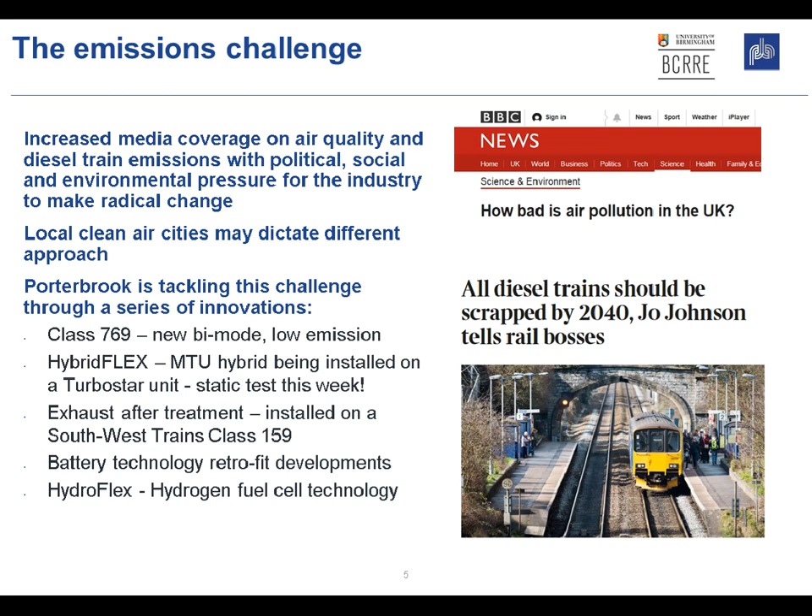So air quality is a big driver, but we also have an issue over carbon efficiency and the drive towards decarbonisation. There's another important factor: the energy supply the UK is currently using. At the minute, most of our energy is coming from low carbon sources, and we have roughly half of it from fossil fuels. But by 2050, that will be pretty much entirely low carbon or zero carbon. So the grid is becoming decarbonised.

This means we can produce hydrogen from the grid, and we don't need to worry too much about the fact that we have some inefficiencies producing the hydrogen, because the grid is already decarbonised. It just becomes an economic factor.

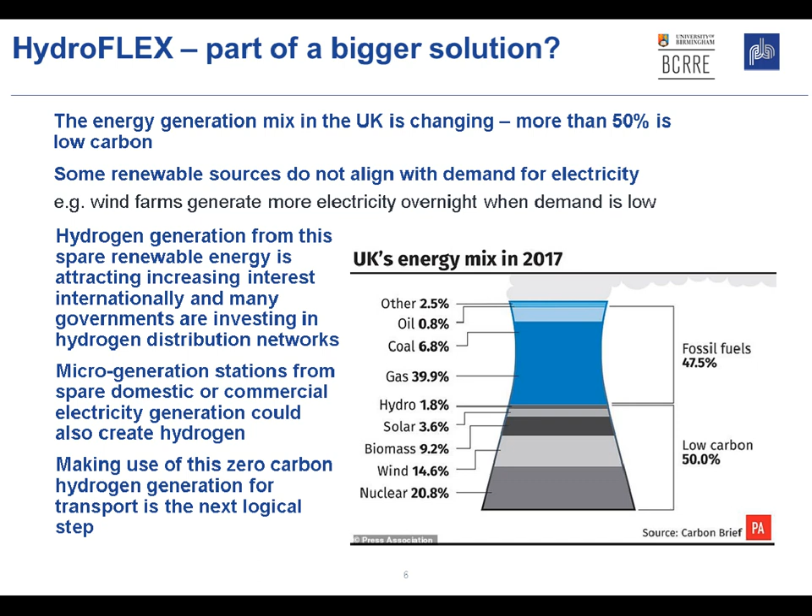Hydrogen is already produced in bulk in the UK. BOC, who provide all the hydrogen for the HydroFLEX train, have a number of sites around the UK producing it in bulk. It's just something the general public don't really know about, because nobody needs to buy hydrogen, but it's used as a process gas in a whole manner of things, used to produce all sorts of different products. We just buy it, and it happens to end up providing power in a fuel cell.

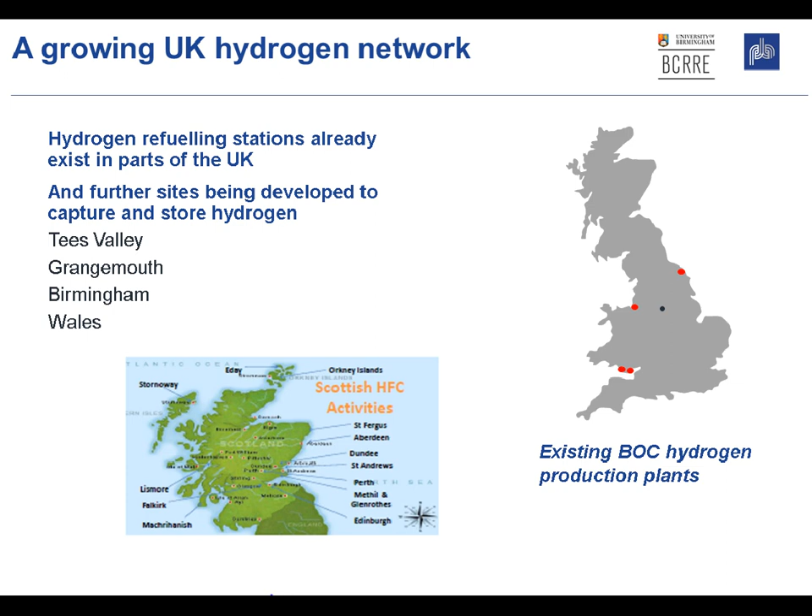So there is already a huge amount of experience of handling hydrogen and transporting it around the country, and it's done incredibly safely. Hydrogen has also been used to provide traction for buses - there's been buses in London for a number of years, and a very successful project up in Aberdeen that's run for several years. We're also looking at things like dumper trucks and dust carts. The power requirements of these are lower than a train, but not far off, so we're really taking bus technology and upscaling it to make it suitable for traction on board trains.

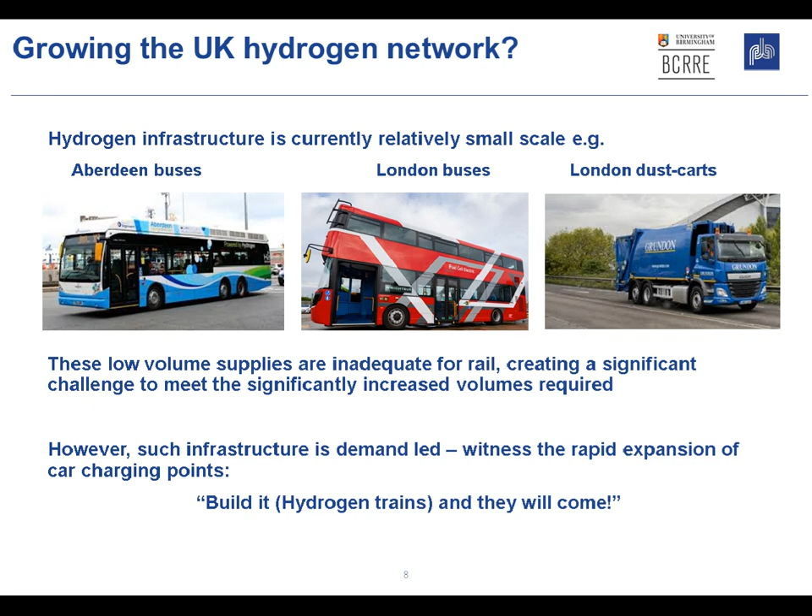So the time is right for this, coupled with the maturity of the technology. Hydrogen fuel cells now are very, very mature technology. The one we've got on HydroFLEX is incredibly robust - we've given it a really tough workout running a train, and it's coped with everything we've thrown at it. Similarly, the hydrogen storage system is mature technology now, with lots of it in application across all sorts of different sectors. So we're in a good time for pushing this technology forward.

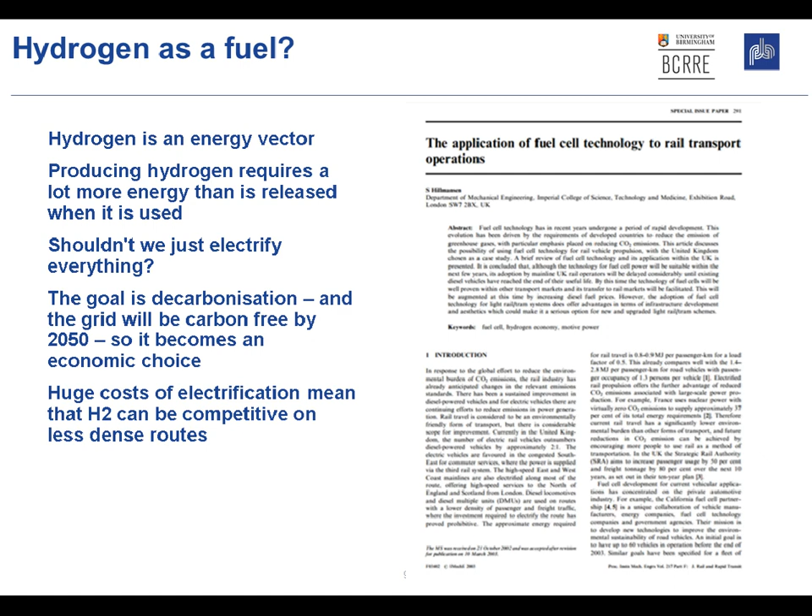So I'm going to spend a few moments talking about the train itself, and then hand over to Ralph, who will go into more detail about exactly how the interfaces work.

The unit that we had, it's nice because it's a 319001, so it's the first unit from the 319 series. It's done about 2.5 million miles, so it was retired and then came out of retirement and had a very enjoyable post-retirement workout as a hydrogen train.

It's a dual voltage train, can take 25 kV overhead or third rail 750 volt DC supply. Ralph will go into this in more detail, but it was very important that we had what's called a DC bus on the train that we could interface our traction system into. That's the whole principle about how we did this, and it made it very easy — the fact that the train already worked off what was effectively a 750 volt nominal DC bus.

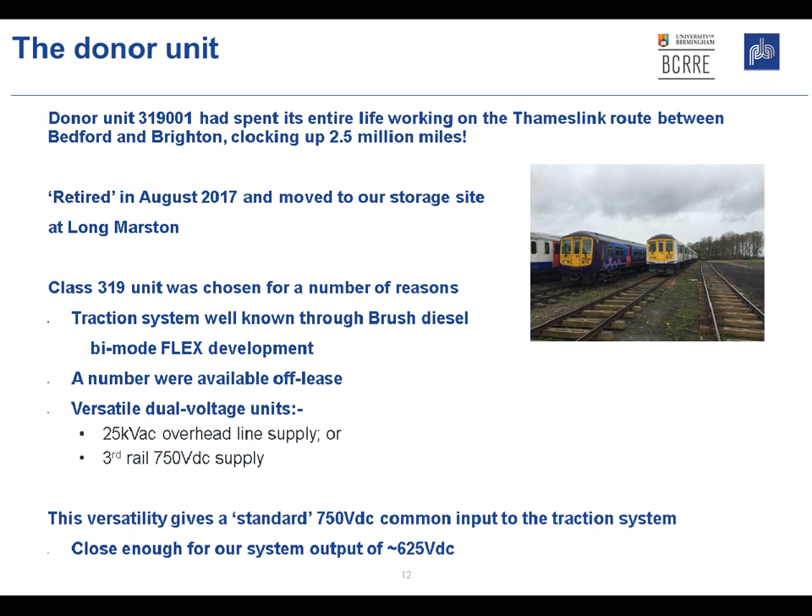There are two reasons for doing this. One is because this was a really short timescale project — we didn't have enough time to package it and put it underneath the train, so it was easier from an engineering point of view. But more crucially, we wanted to set this up as a kind of working laboratory, so we were able to demonstrate the vehicle and show when everything was shut down. We could show guests around the carriage and point to stuff — the fuel cell, the hydrogen system, the control system, and the battery, which is what you can see there.

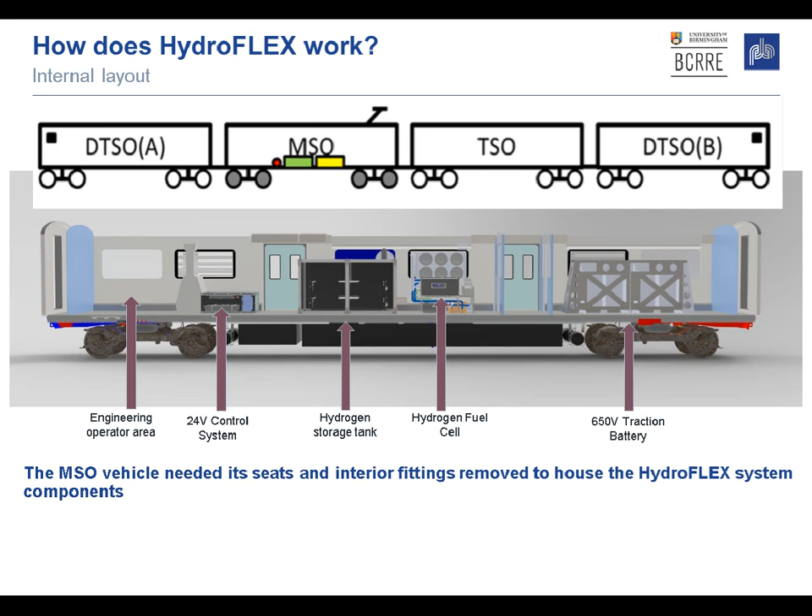People could see firsthand the technology, and that was a big help in terms of demystifying things like hydrogen storage and so on. People were able to stand right next to the hydrogen storage tanks and see how they work, see how the fuel cell works, where the hydrogen goes into the fuel cell, where the power comes out of the fuel cell, and where it's connected to the batteries and so on.

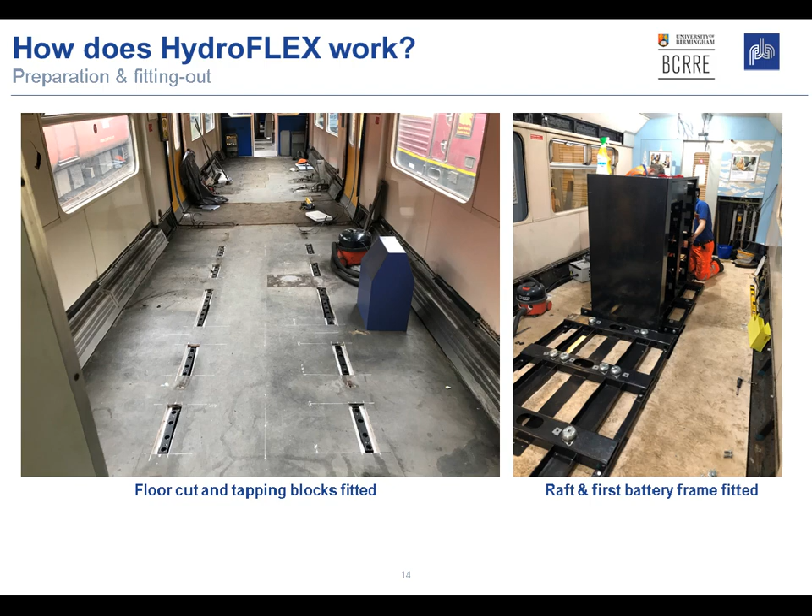We did a lot of engineering work with companies like DG8, who did all the finite element calculations to ensure that how we are attaching all the equipment to the train was safe. It was all done to GM/RT2100 standards, so we could survive a 5G shock load and cope with overturning forces and fatigue forces. We did that for our demonstration at RailLive with a view to eventually taking the train onto the main line, and getting full design calculations done was an important part of that process — DG8 did a very good job of that.

Here we can see the hydrogen storage tanks. These are tanks made of an aluminium liner wrapped in carbon fibre, with a 350 bar working pressure. Each tank stores about 5 kilograms of hydrogen, and we've got 4 of them, so we have just slightly under 20 kilograms of storage, and they can run the fuel cell for around about 4 hours. It's designed to standard EC79.

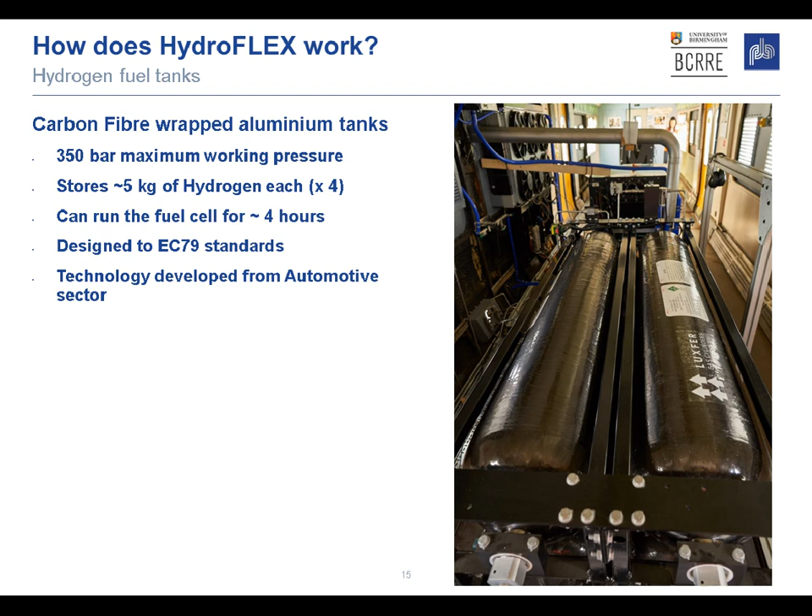That's technology adapted from the automotive sector. Hydrogen is a bit of a funny gas — it's got what's officially called a negative Joule-Thomson coefficient. So when it's expanded into the tanks, refuelled from a higher pressure outside, it actually gets warmer as it expands. The gas goes into the tanks and heats up, and it can increase the pressure. So when we're filling these up, we can go higher than 350 bar because the gas expands, gets hot, and then as it cools down later, it settles back down to 350 bar. It's quite a strange gas in that respect.

This is a picture of our fuel cell. It comes from Ballard, produced in Canada, and then it was commissioned in Denmark. We went over for a very nice few days checking it out in Hobro, Denmark, before it came back and got fitted into the train — shown here in position. As engineers we were very much thinking of this as a black box: it had inputs and outputs, hydrogen inputs, control inputs, power outputs, and it produced power that was fed through a DC to DC converter, controlled with a CAN bus and some other hardware signals that then fed into the main bus line of the train.

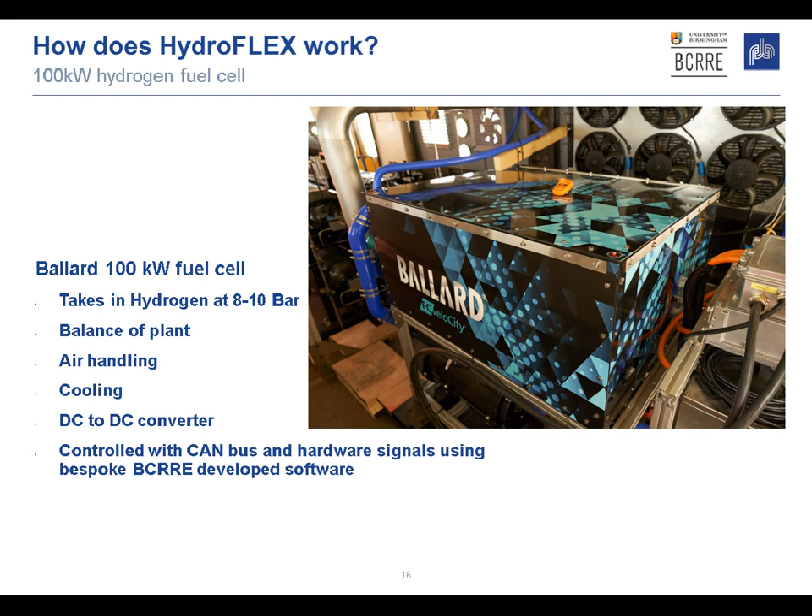Here's a picture of the battery. It's a hybrid system—we had both a fuel cell plus a battery working in tandem. There's actually 2 battery packs, so in effect we had 3 power sources on board the train. The total energy storage was 84 kilowatt hours, used to provide the system voltage of the train. We designed these battery packs to have a nominal voltage of 625 volts, which is somewhere in the mid range of what the train could work at.

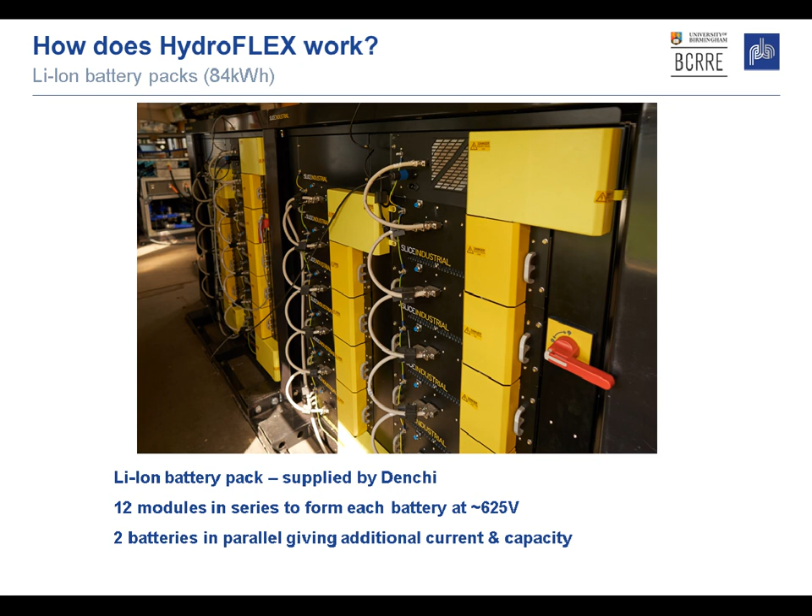Just a quick slide on how a fuel cell works and why fuel cells are really quite important as a power source. They take in hydrogen into an anode, and air goes into the cathode side, through an electrolyte membrane. On the anode, you have a catalyst, and the hydrogen atoms land on the catalyst, dissociate and become protons, or hydrogen positive ions, and electrons.

The hydrogen ions, or protons, pass through the membrane. So you sometimes hear fuel cells called PEM fuel cells, which stands for proton exchange membrane, and the protons travel through the membrane to the other side. They mix with the oxygen, which also dissociates and becomes oxygen ions, and they recombine with the electrons to produce water. The electrons actually travel around an external load circuit, producing electrical power in that process.

The advantage of this method is that it's an electrochemical reaction rather than a combustion reaction, so the theoretical fundamental efficiency can be much higher than you could achieve through a combustion process. It's not 100% efficient, but we can get up to well over 50% efficiency for this process, which is higher than what you can achieve in combustion.

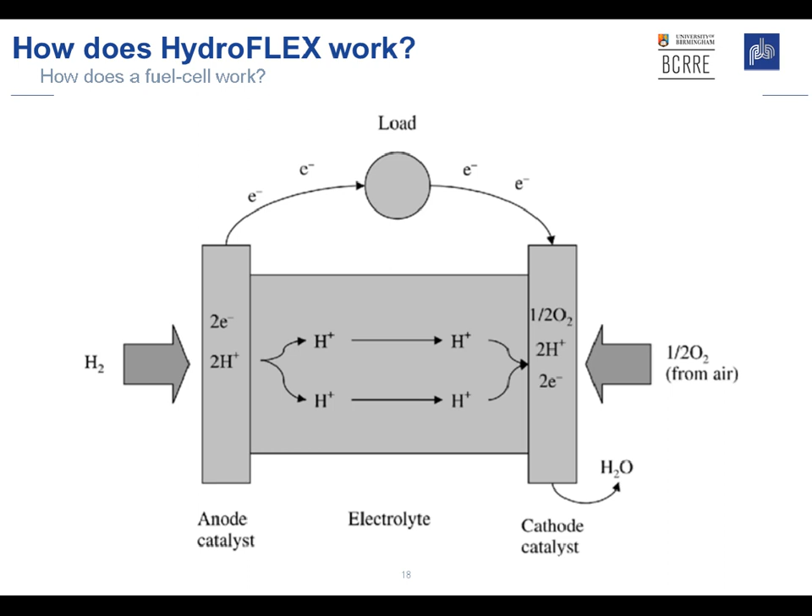So this is some of the pictures of the refueling system. We work with a company called Fuel Cell Systems, and the orange tanks are how we receive hydrogen. This comes from BOC—we buy these tanks of very high purity hydrogen, which is required by the fuel cell. It does cost a lot of money right now, but the cost of these hydrogen tanks should come down in the future.

We then transfer the hydrogen from that into the van at high pressure. We pump the hydrogen from 170 bar up to something like 500 bar, which goes inside that lorry shown there. Then we can decant that straight into the train and refuel it in 10 to 15 minutes with rapid fueling—a similar kind of refueling time as what you'd get on a standard diesel train.

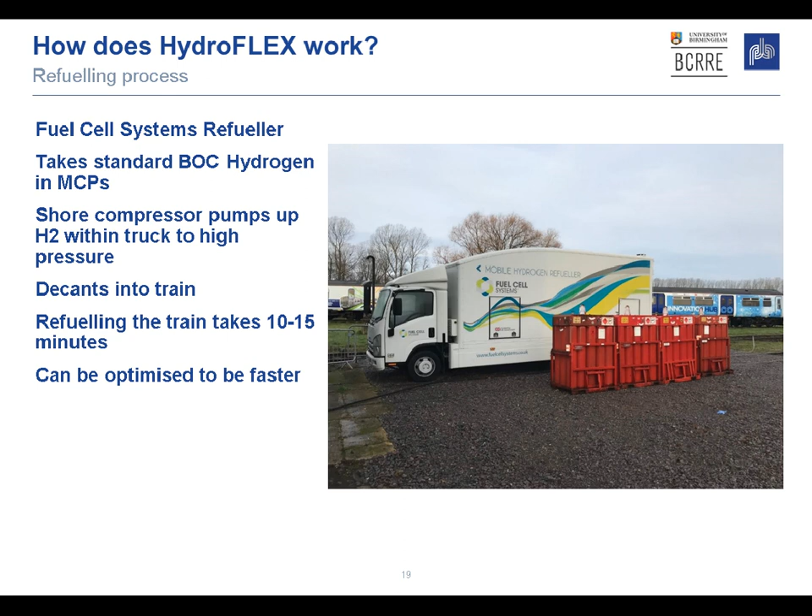So that's it from me. I'm just going to hand over to Ralph now, and he's going to take you through some of the in-depth work we did to interface with the traction system and provide the smooth power flow from fuel cell and batteries into the traction system to get the train moving. So over to you, Ralph.

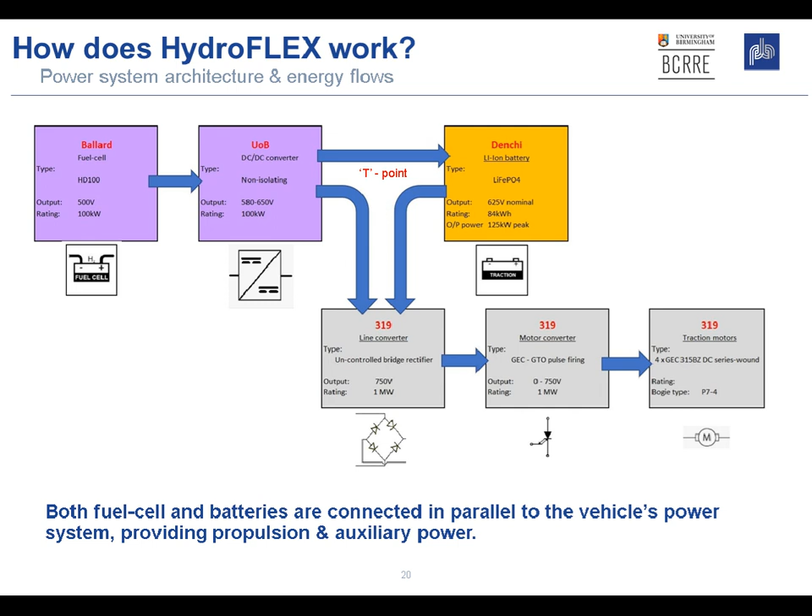So, moving on - a chopper is essentially a high-power electrical switch. We switch this switch off and on with a pulse train, using what you call an on-off ratio or a mark-space ratio to control the amount of power going to the motors.

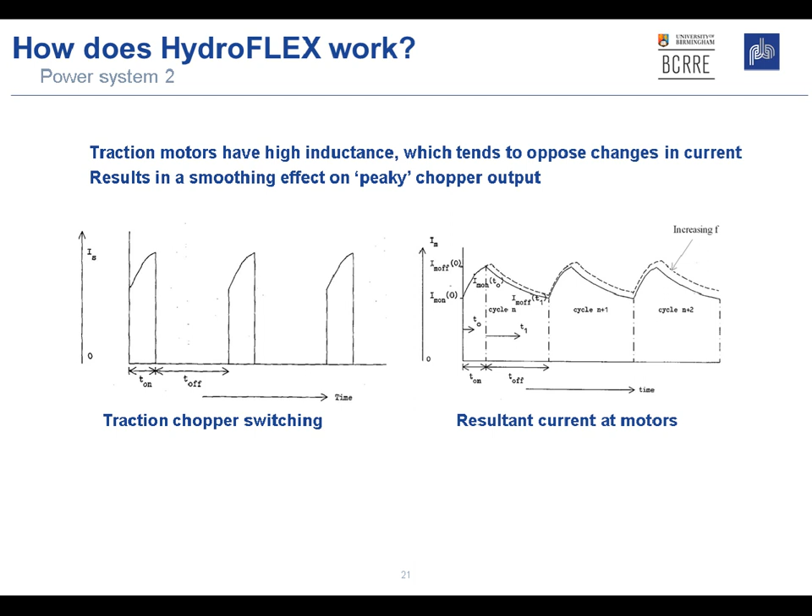So in designing this train, there was a bit of a problem statement. The train's rated at 1.2 megawatts on the AC overhead line, and a little less on DC, but still substantial power - and we only had a trifling 200 kilowatts available. So it's a very aggressive power system. It ramps up power very quickly, and it's clear it would overwhelm our power system if we didn't manage that somehow.

Even at that, it was still quite a lot of power for the train to deal with. So we had another secret weapon to call on.

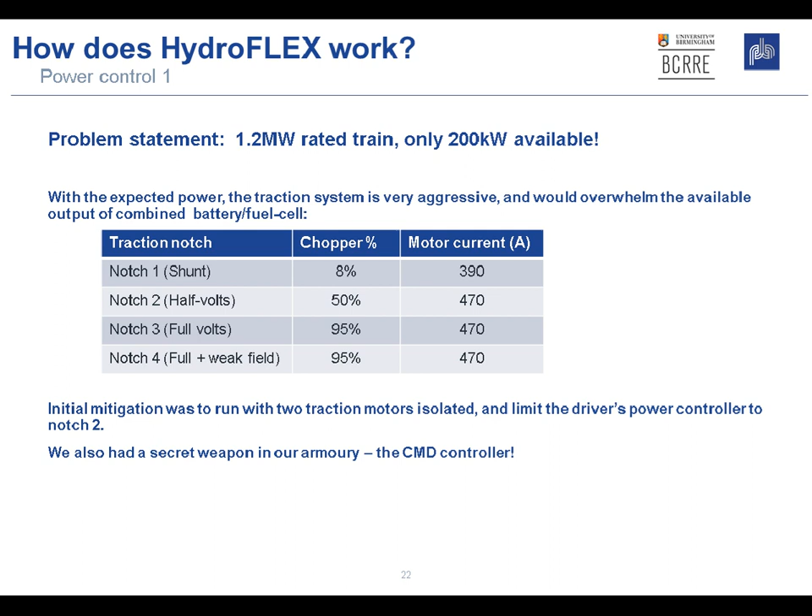People in the northwest, which is the IMechE region, will probably be familiar with the northern bimode flex trains that Porterbrook produced. They had a similar issue, albeit on a slightly different scale. Their twin engine output was 780 kilowatts, whereas the unit was still 1.2 megawatts, and to a lesser degree they also had the problem of dumbing down the power demand. So they had to develop a means of limiting this.

What they did was look at the existing traction system. This is a typical closed loop control system. You input the current you want from the system, the chopper creates a waveform, and you get power into the motors. But the closed loop feedback trick is to actually measure what you're getting at the motors and feed it back into the system to fine tune the value you want. That's a continuous process of set, measure, and adjust based on feedback. This device is the CMD, or the current monitoring device.

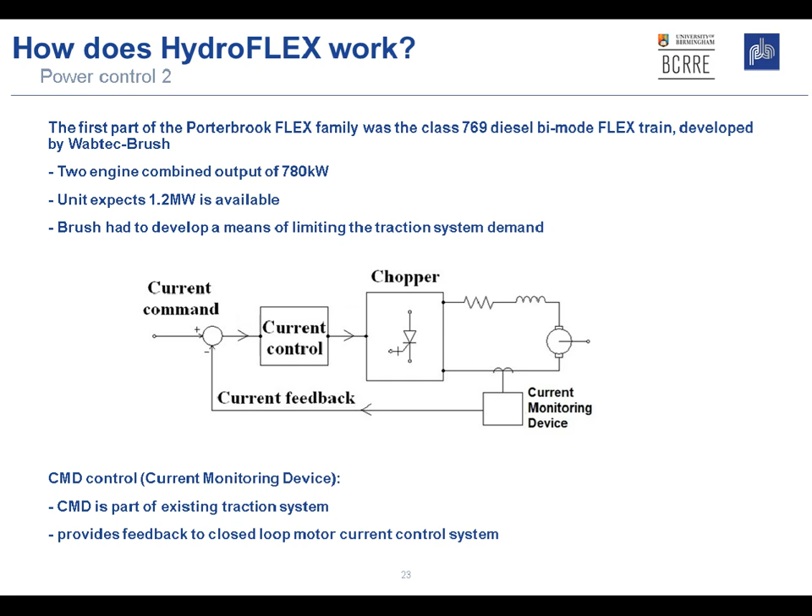The clever thing Brush did on the bimode flex was intercept this feedback signal - they were able to adjust that signal and apply a gain factor, or multiplication factor, to fool the traction system into thinking it had the power it wanted.

As an example from the table earlier, at notch 2 the system's increasing the chopper to try and get 470 amps in each motor. So if we were somewhere around 300, 310 amps, we apply a multiplication factor of 1.5. The signal going back into the system says, yeah, I've got 470 amps, I'm fine, you can stop increasing the chopper. This is how we actually manage the power system in the train and stop it from overwhelming our meagre power output.

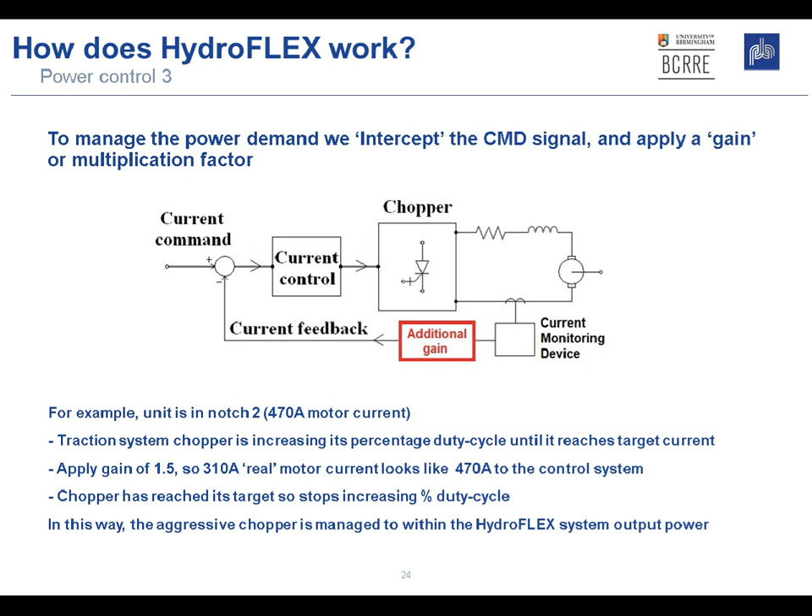I hope you can see this, it's not too small. It's an example trace of some of the testing work we did at Long Marston. The blue trace at the top is the traction motor armature current. The red one is the speed, maxed at about 20 miles an hour on this run, which is about the limit of the track at Long Marston.

The green line here is the CMD. Now, this was fully manually controlled at this point in time when we were doing the RailLive testing. I had a control box and I was twiddling a potentiometer, trying to adjust this green trace to keep the purple trace at the bottom, which is the line current, under a threshold of 360 amps, which is all we had to play with.

And that was quite a fast ramp. It was quite difficult manually to actually keep up with that and keep it within the limits of the power system. We didn't always get it right. Occasionally we didn't manage it and the battery or something else would say, no, that's too much current, and it would just shut down. That happened a few times, unfortunately.

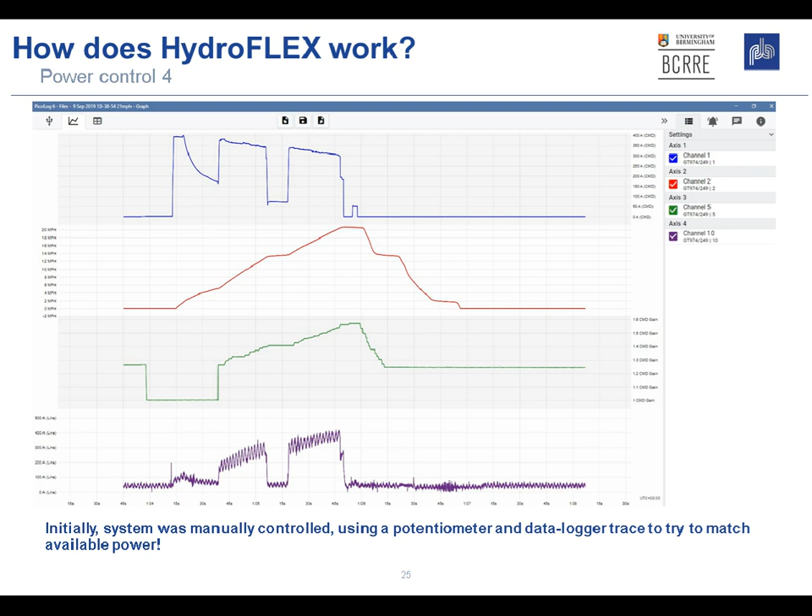Now obviously that's not an ideal situation. The box had an automatic control feature on it, but at that point in time we didn't have enough confidence in the behaviour of the system to know how that was going to react.

People were quite used to me sitting there with the headphones on and twiddling knobs, and actually my radio call sign became DJ Ralph at one point. DJ Ralph, go spin your dials.

So with that experience, we were then able to set it up better for the mainline version.

Yeah, we did, after initial testing, we had the RailLive event, which Stuart mentioned, and we were carrying quite a number of visitors on numerous trips each day on a short section of the test track at Long Marston.

We even had the rail minister on board. I've forgotten the guy's name - it's a revolving door at the Department of Transport, you can never remember who it is at any one time. And we had the BBC on board as well, doing some interviews with my colleagues.

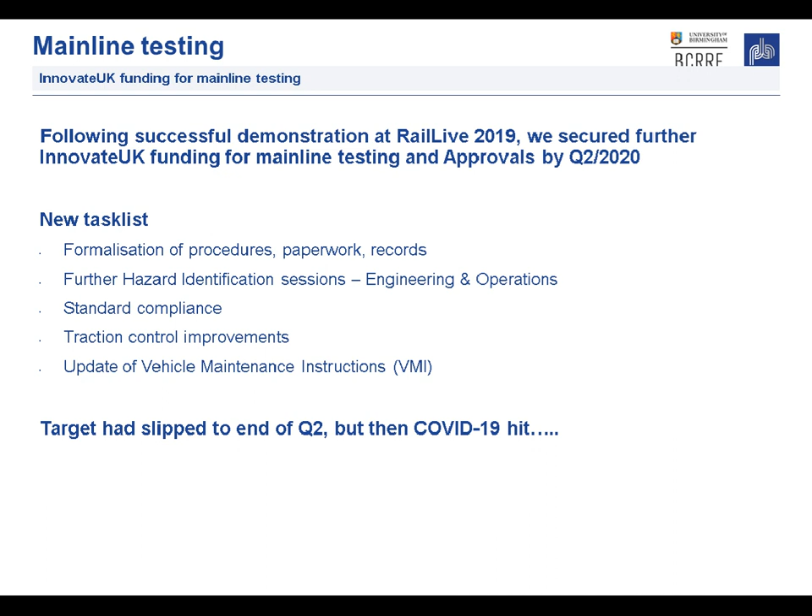So yeah, there's a few technical changes. Clearly, from what I described earlier, the setting the power control was not an ideal situation, and certainly not repeatable for any length of time on mainline driving. So we had to get the power control automated. And to feed that, we needed to understand what the limits were in the system.

Depending if your fuel cell was up full or your batteries were both online, you may have different powers available. So we had to have a system of determining what systems are online, setting an appropriate power, and then managing the output of the fuel cell accordingly. A few other things in that - weak field is another thing we added, I'll explain that in a bit.

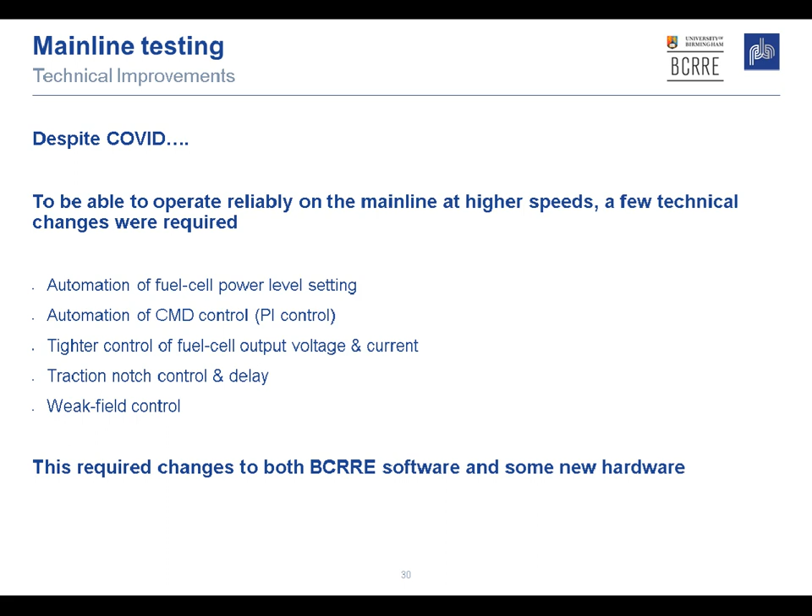What we did was we had some control relays in here which inserted a short time delay into the notch. So, for example, driver pulls notch 1, we pause a second while we signal the fuel cell to ramp up its power output, and then we let notch 1 into the traction system, which behaves as normal. There's various time delays to allow fuel cell increases at different notches.

We also changed the wheel slip management on the train. Class 319s have a very binary wheel slip system. It's quite good at detecting wheel slip, but it just kills power completely, and then when it sees slip stopped, it just puts power back on in full. That's a very rough and aggressive way to manage wheel slip. What ends up happening typically is you cut power, and as soon as you apply power again, it spins again. So it's not very good.

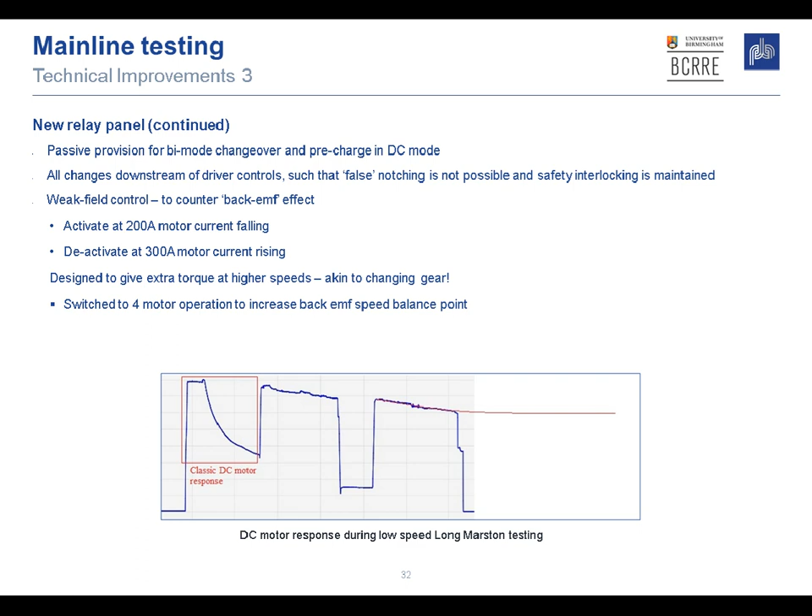So we did something quite unusual. We looked at something called weak field, which is normally applied at quite high speed on a 319 - applies at something like 60 miles an hour when it's on full chopper. It uses this to get an extra sort of boost of power. So what it does is it reduces the current in the traction motors so that there's less of this reverse voltage being created, and allows you to get more energy into the motors and speed up.

So going back to the actual mainline certification, to quote a TV program, paperwork - there was just so much of it to do. It was quite daunting at times. So we followed the standard common safety methods and the usual approvals bodies were involved, and consulted ORR to make sure they were happy with our approach so they could agree that the train could operate.

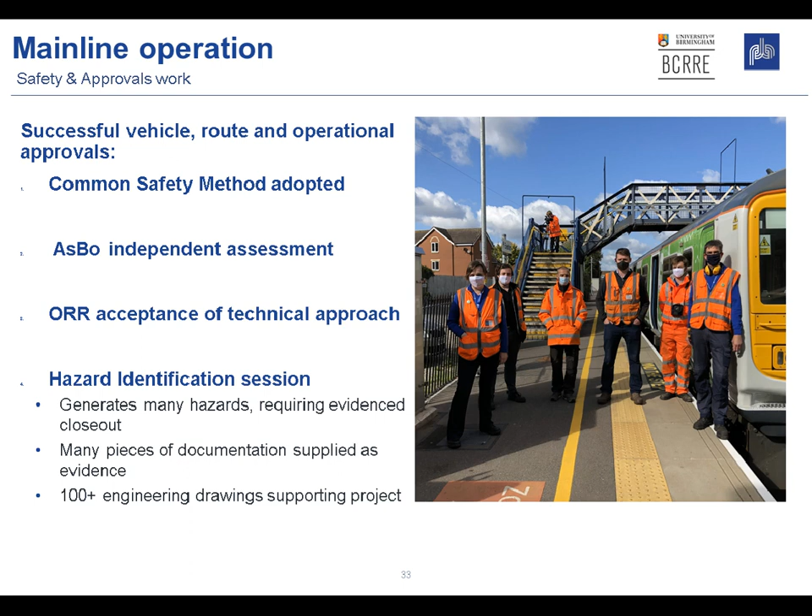As per the common safety method, we had a hazard identification session, and this generates lots of work. There were 175 hazards that came out of that session, and every one had to be closed out with a written argument and sometimes other implications, like implications on maintenance or design, etc. They ended up with 177 different pieces of documentation to close out these hazards, and I think there was about 105 engineering drawings as well to support the project - lots and lots of paperwork.

More approvals - 11 different technical standards, and trying to meet these standards there were 69 different technical questions. Some had single answers, some took 2 or 3 iterations to satisfy the approvals body. The network rail part had another 10 or so questions needing answers and responses - quite an iterative, long-winded and slow process. And not forgetting our own internal change control process, convincing people backing the system that it was a safe train to work.

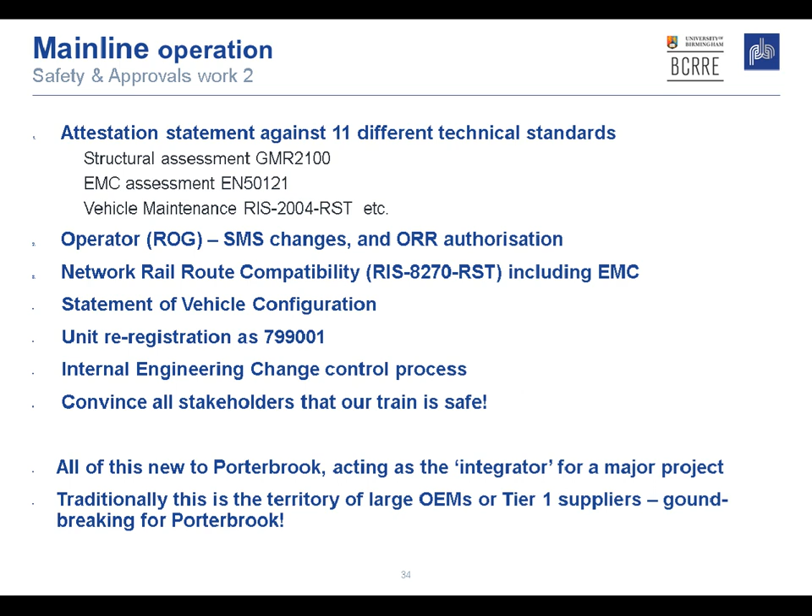Just a little footnote: this is quite unusual territory for a ROSCO like Porterbrook to be an integrator. Usually OEMs like Bombardier, Alstom, or Tier 1 suppliers would do this kind of work, so it was quite an unusual place for a ROSCO to find itself.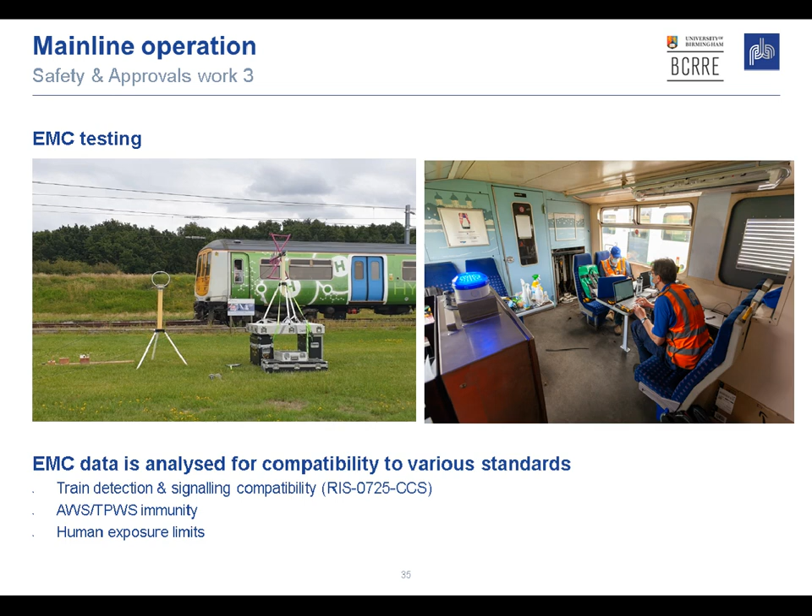So here we've got a short video to indulge ourselves a little on the first mainline run. So enjoy.

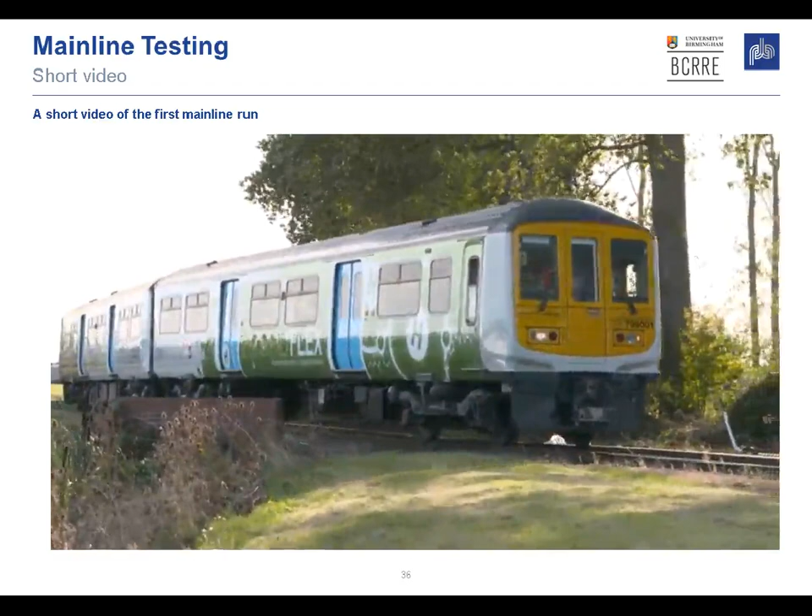HydroFLEX is the UK's first hydrogen train. It's also the world's first bi-mode electric hydrogen train, and today has been a historic day because it's the first time we've seen a hydrogen train running on the UK mainline railway, as we left Long Marston and went up to Evesham and back successfully. It takes a lot of work to get a hydrogen train to run on the main line - there's a huge amount of safety approvals work we have to go through. We've had to formally document a lot of things, record things, assess the hazards, assess the risks.

Hydrogen is really important in terms of offering decarbonisation solutions to the rail industry, mainly because you can produce hydrogen from renewable sources by electrolysing water. Hydrogen is going to be used on the parts of the railway which are just not economic to electrify.

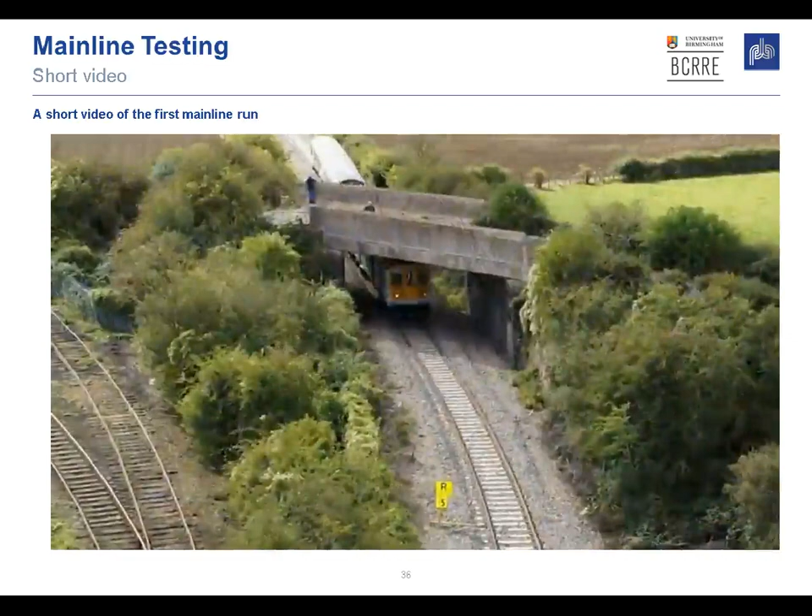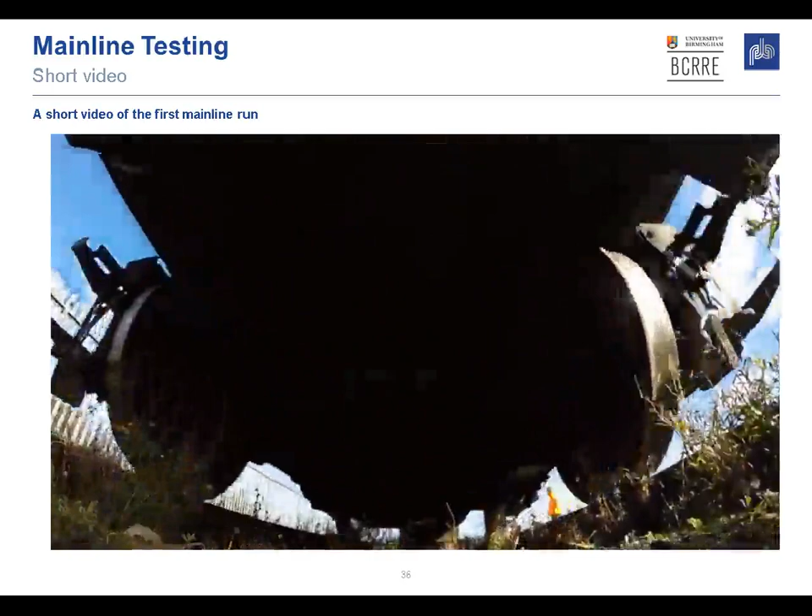I can't describe how proud I am of the whole HydroFLEX team to get the first UK mainline hydrogen train working. It's been an absolutely fantastic project, a personal career highlight for me, and also a real big step forward for the UK and decarbonisation of the railway.

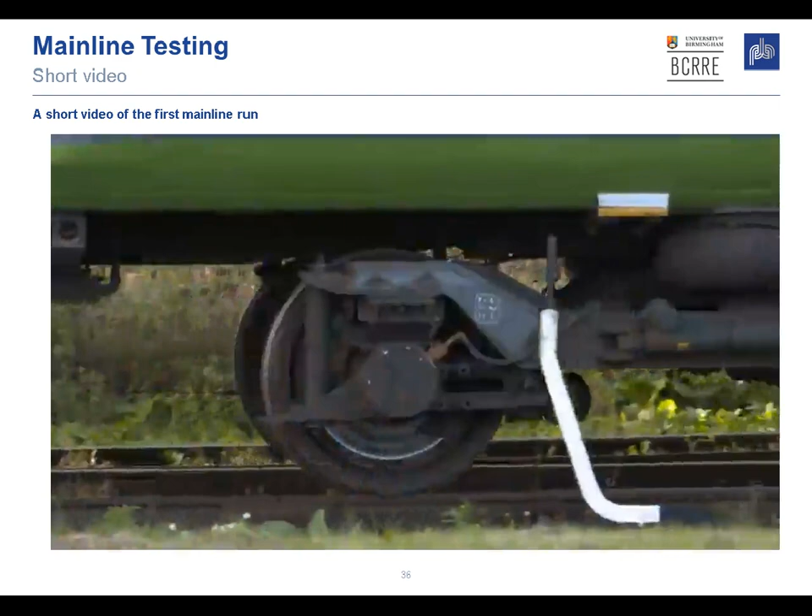One of the best things about being at the University of Birmingham is we do really good practical and industrially focused research, and we've always had a record of doing that. We developed this partnership with Porterbrook just over 2 years ago, and Porterbrook have been a really innovative company, willing to take a risk on the technology and work in partnership with us to get to where we are today with the HydroFLEX train.

It's been so exciting for the team to draw together all that work we've put in and see it running at high speed on the network, and more importantly, to demonstrate to the industry that this technology is the future.

As I said earlier, we expected the traction power to flatline at around 35-40 miles an hour, but the weak field worked an absolute treat, and we were pleasantly surprised to be touching 50, which is a real achievement, much to our surprise.

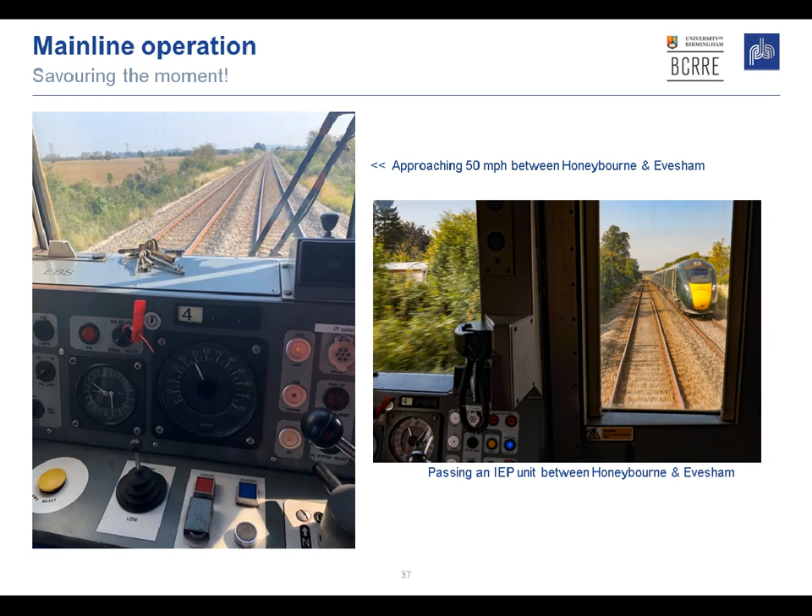Some more pictures. Arrival at Evesham the first time, which is a historic moment. The last time that train had been at Evesham was on its way into Long Marston, towed by a Class 37 or something to go into storage. So a triumphant return, I think, would agree.

And the first trip, top right, you can see it just coming back through Evesham station. And then on the first trip, we seemed to manage to get a busy day at Long Marston. There was lots of traffic on the branch with stock either being taken in or taken out of Long Marston, and also Viva Rail running their battery train up and down. So we had to sit in the sidings and recess for a bit, so it gave us a good photo opportunity. Well, photo opportunity for the people with the PTS, which was not us, it was the driver crew.

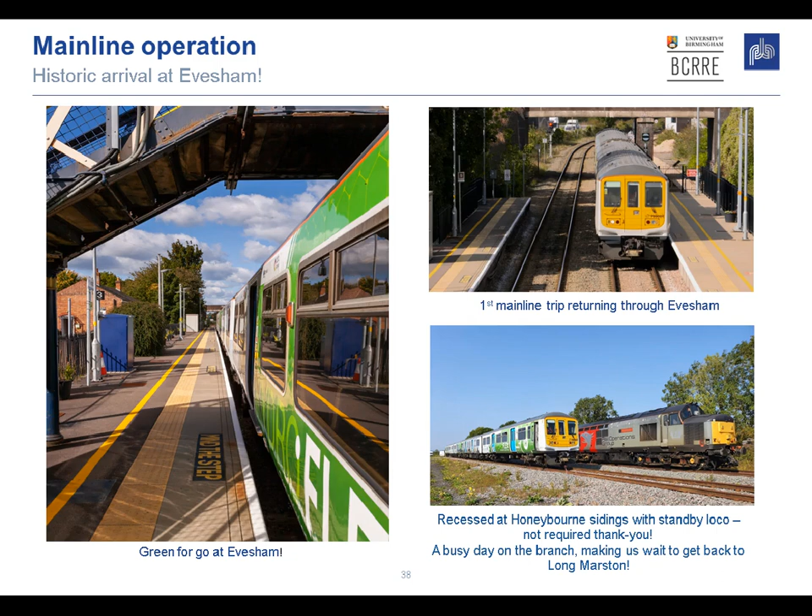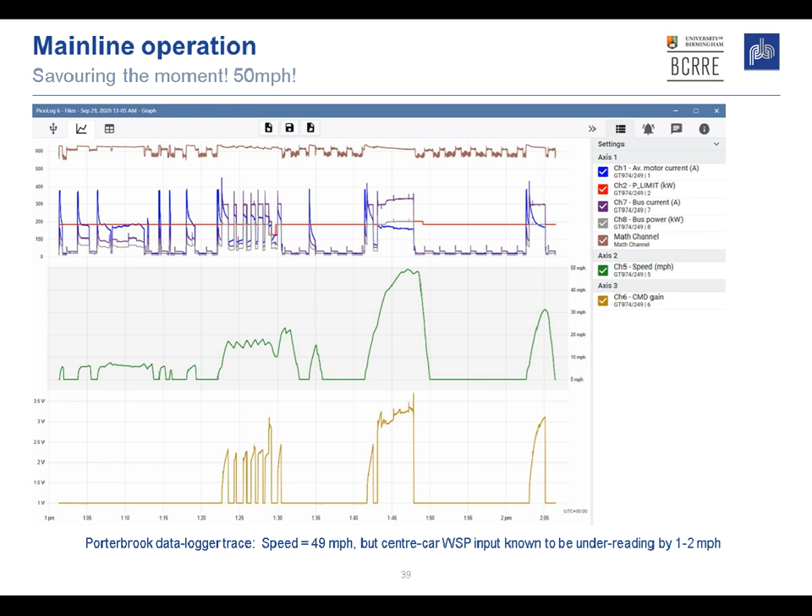So just touching back on the weak field thing we talked about, the middle graph here in green, you can see the speedo just under 50 miles an hour, but we did have a known issue with the speed input in that car was 1 or 2 miles an hour under, so we knew that was slightly under the speed. I don't know if you can make it out on the purple trace. The purple trace on the top graph is the line current, and there's a step up just about the 40 mile an hour mark, and that's where the weak field kicked in. It's almost like a gear change. It gives you another boost on torque and actually gives you a bit of a burst of speed, and you can actually see the graph climbing a bit after that point and getting to our amazing 50 miles an hour point.

So this is the Birmingham University data logger as well, and again you can see a big step up in current associated with the weak field change, and then another small step up later on around about 3,400 seconds. I think that's actually the compressor kicking out. It's quite a significant load in the system, the compressor, so it will give us an extra bit of power when that's switched off.

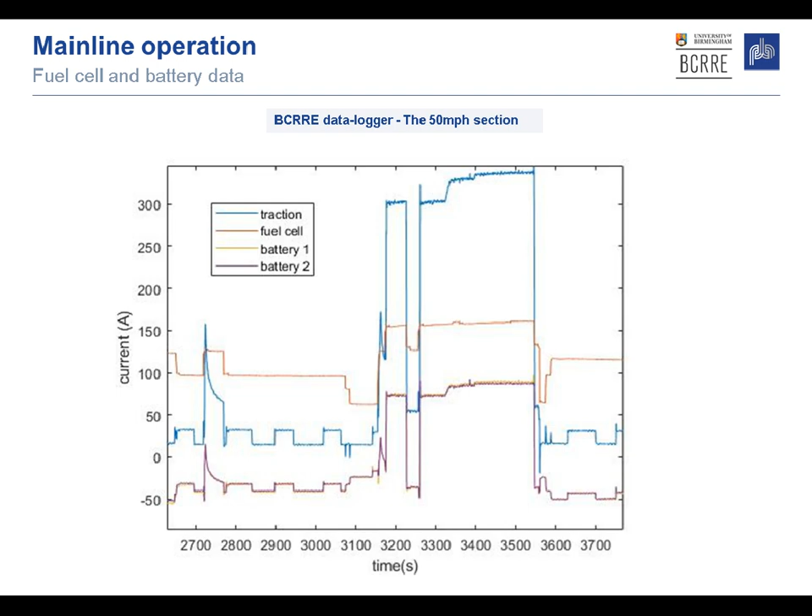So Innovate UK are really pleased with the work we've been doing on hydrogen, and they've now given us further funding to try and make it more of a productionizable setup. So we're trying to get as much equipment as we can underneath the floor, although it's a challenging and limited space. We're doing what we can there. So the next unit will be another 319, but a different one, and it will have fully retained bi-mode functionality.